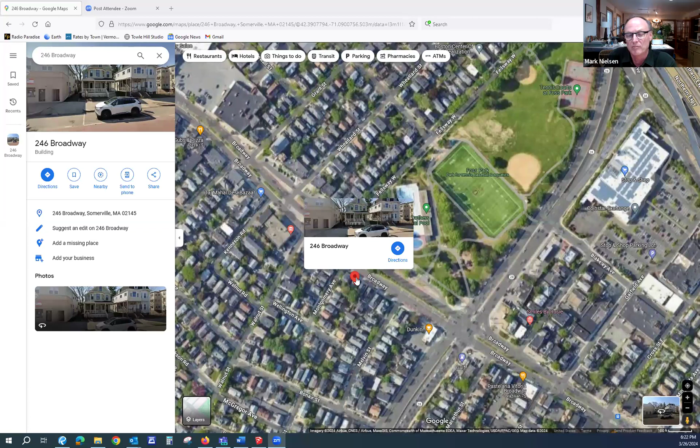Thanks, Adam. Let me just share my screen. I hope everyone can see the Google map here pulled up. Just a quick spin for orientation purposes. Foss Park is here, and our site is across Broadway from Foss Park. This is the structure that would be taken down to make way for the proposed project. View up and down the street. This location. So this is our proposed 5-story building that Adam just mentioned. And he ran through what the project yield is on the site.

The lot area is 3,660 square feet, which is small enough to require us to have 1,500 square feet of residential gross square feet per dwelling unit. It also is on a pedestrian street, so we are required to put commercial space on the ground floor. And the sidewalk is about 15 feet wide. So the front of the building adheres to the 2-foot required setback because the 12-foot setback off the curb doesn't affect us. And I'll just skip through the landscape plans for now and go to the images.

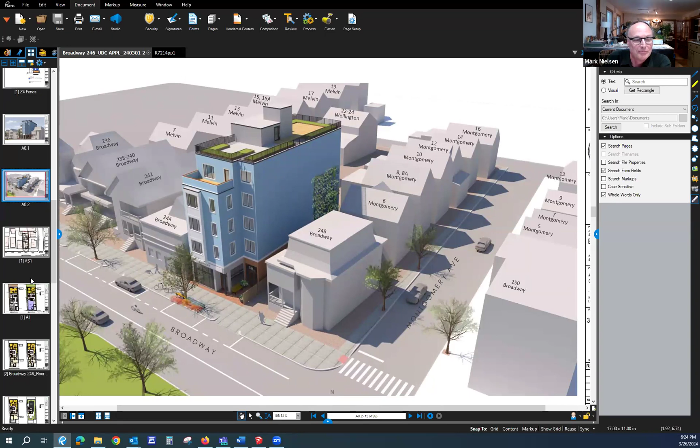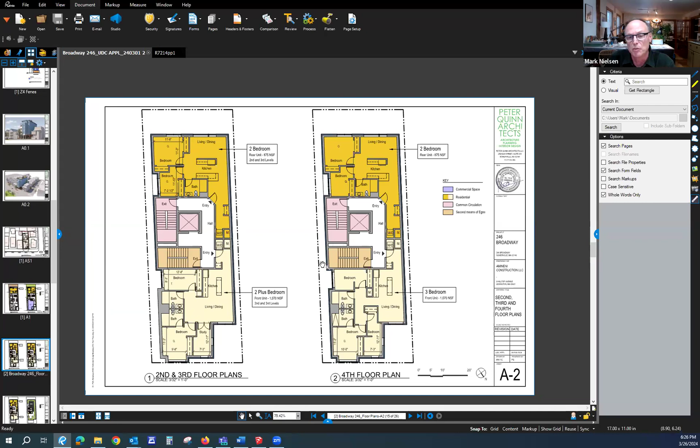On the upper levels, the building just zones out pretty straightforward. There's a front unit and a back unit. And there's an elevator and fire stair core. Windows are primarily set on the front and the back of the building. We do have a notch in the building in both the front and the rear unit that accommodates windows for second bedrooms.

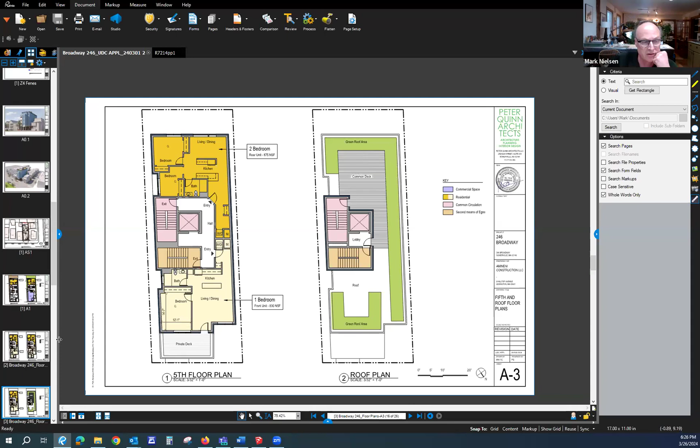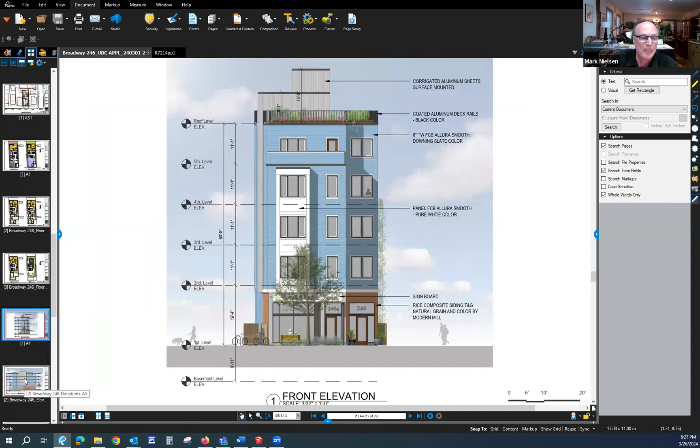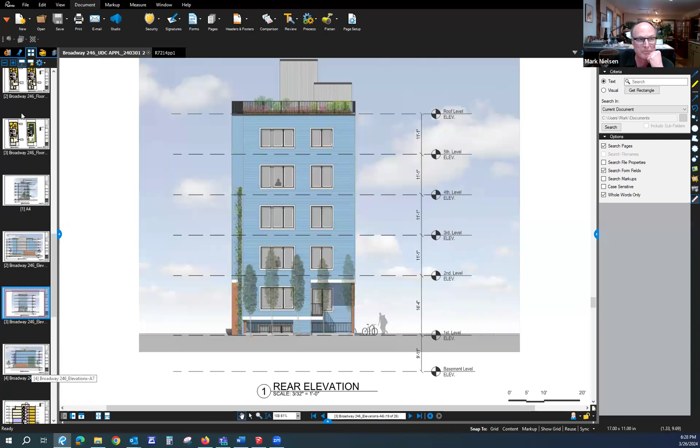Rear facade. The rear facade is set back 10 feet from the rear lot line, and it's cut in in this area here on the first and basement level. This portion is for a set of steps that come out of the basement and go into the backyard. And this is a small outdoor space, allowing for some larger windows into that basement. Back up to the plan to catch that. We're talking about this little area here.

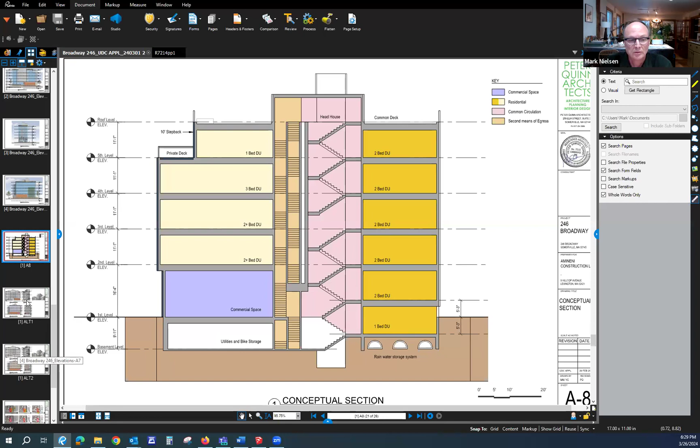And here's the rear elevation. So this window is now flush with the back of the building.

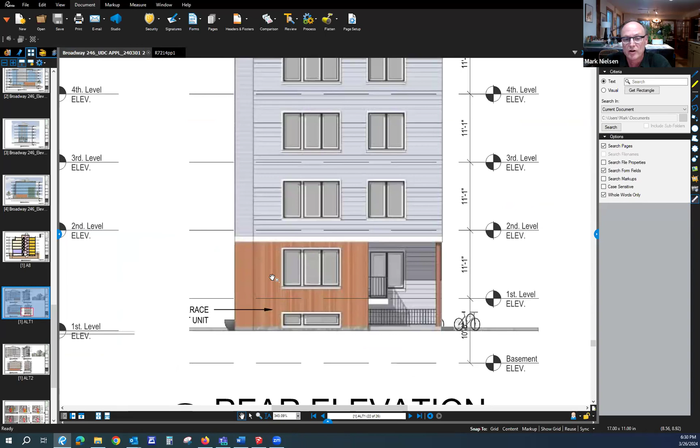And the second alternative is all the same maneuvers in the back of the building, but with a further reduction in the front of the building and making this a 2-story bay as opposed to a 3-story bay. In the front here, we have brought back a second material so that there's a material change between this portion of the building that sets forward on the street and the entry wall of the building behind. So this would be a lap siding and this would be shiplap.

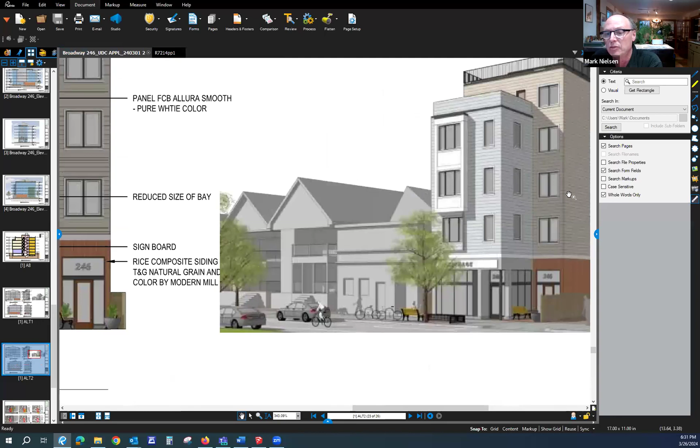That's another idea. And in the back, we've played around a little bit with a panel, a fiber cement board panel that would tie these windows together and break up the wall of the rear elevation a bit.

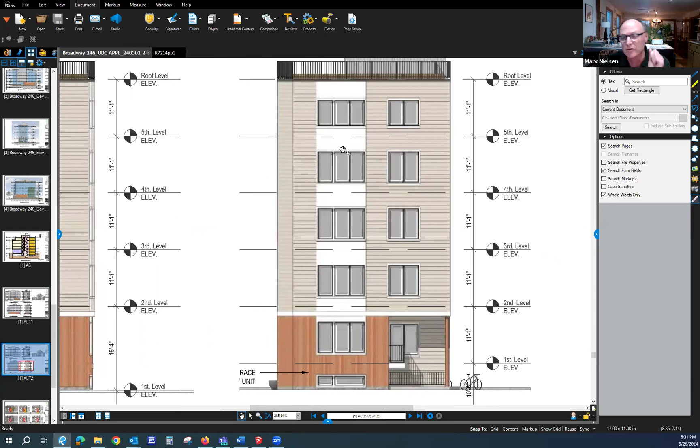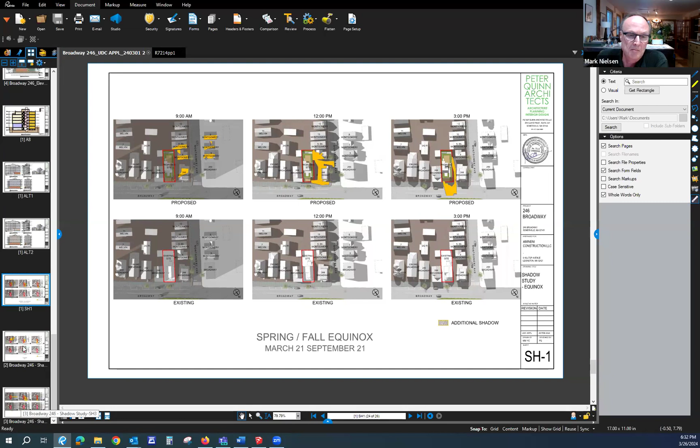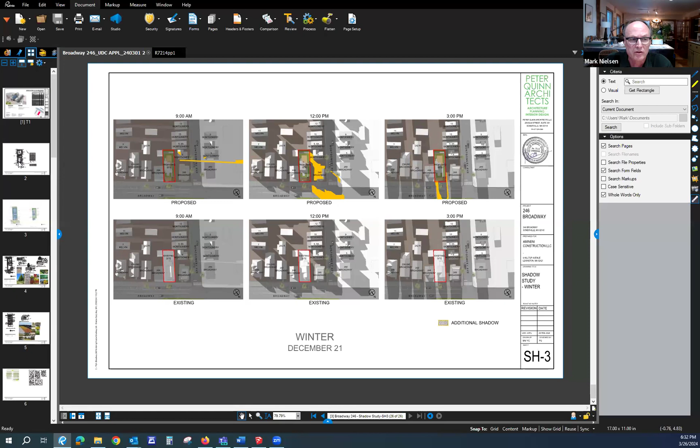And winter. And with that, I can turn it over to Katya. And Katya, what would you like me to start out with? Just the first drawings? That page there, yeah, that's perfect, thank you.

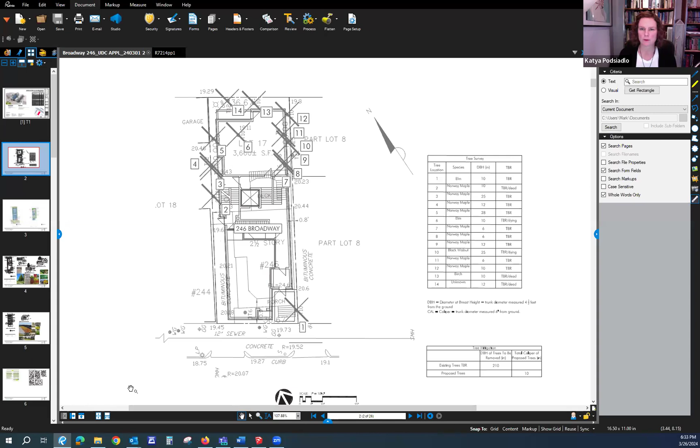Next slide, please. So this is our landscape plan and the roof deck plan on one page. If you want to zoom into the left one to begin. We're focused on two main goals, supporting residential living in this building, and then also making lots of improvements to the public realm, as you can see in the streetscape there.

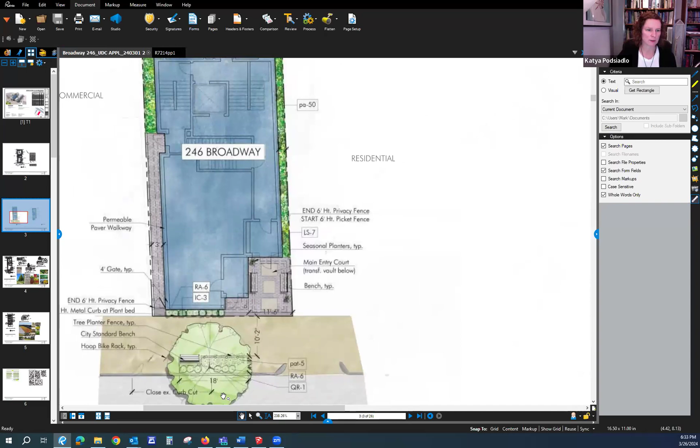As Mark mentioned, there's an existing curb cut towards the left-hand side of our property frontage. That's the existing one on the right. The one on the left is being closed. So the driveway that serves our current site will be closed, therefore making the sidewalk contiguous and safer for everyone walking up and down the street.

Also, to improve the aesthetics, we're proposing a new street tree and a generous tree well, a new short-term bike rack and a bench, as well as structural soil below the adjacent concrete pavements to support tree growth. As you know, in Somerville they like 1,000 cubic feet of soil for trees, so we try to achieve at least that.

We're showing permeable unit paving along the left-hand side of the building to access that egress doorway from the left-hand side stairwell. And at the main front doors to the lobby and into the retail space, we'll also have special paving.

The project is proposing new privacy fencing around the sides and the rear, but also at the rear we have some increased setback. Mark, can you remind me what the distance was before and now, the actual dimensions? I don't have it noted on the plan. Yes, it's 10 feet to the face of the foundation, and with the extra insulation, it's 9 feet 8 inches from the property line to the outside face of the building.

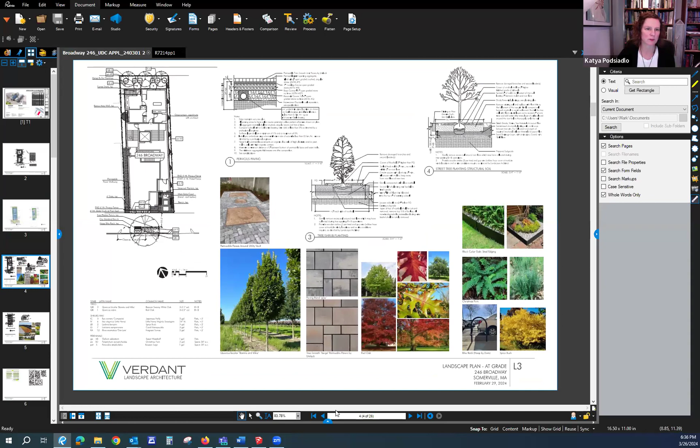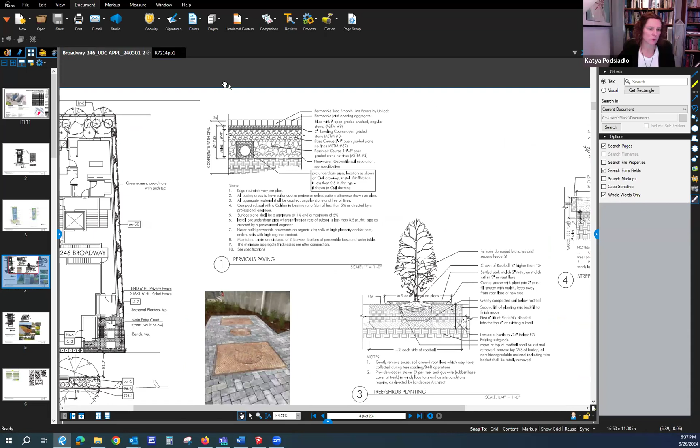The image in the middle of the page shows an installation that we've done a couple times now in Somerville for a transformer vault, with the unit pavers cut to fit around the vault covers. So there is going to be a transformer in the ground at the front entry, but it works quite nicely to have the unit pavers cut right around it, and it's all flush. So we're able to kill two birds with one stone, if you will, right at the front.

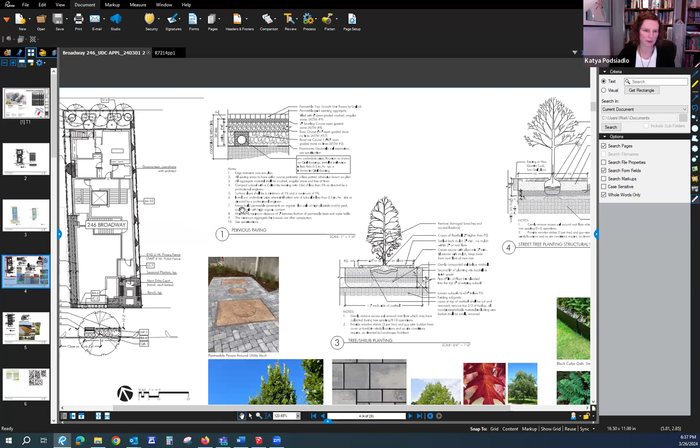Those are just some of the varieties of the trees shown in the other images. And then on the next plan, we can zoom to the roof deck materials and get a sense for some of the things we're proposing up there. I'm not 100% sure what kind of pedestal pavers or decking will be used, but it would be either your typical modular 2x2 system or more of a sleeper and composite wood deck system.

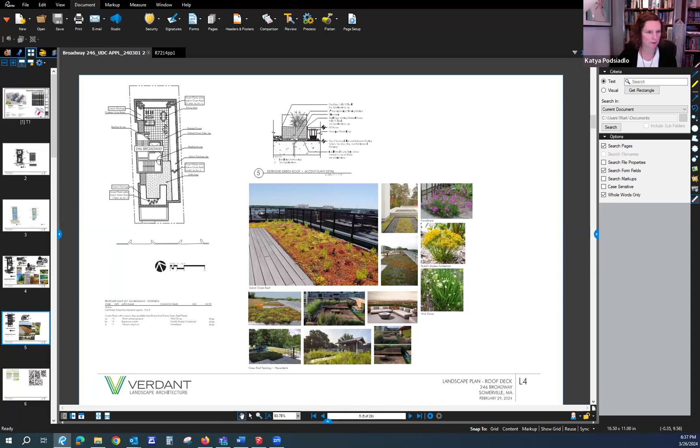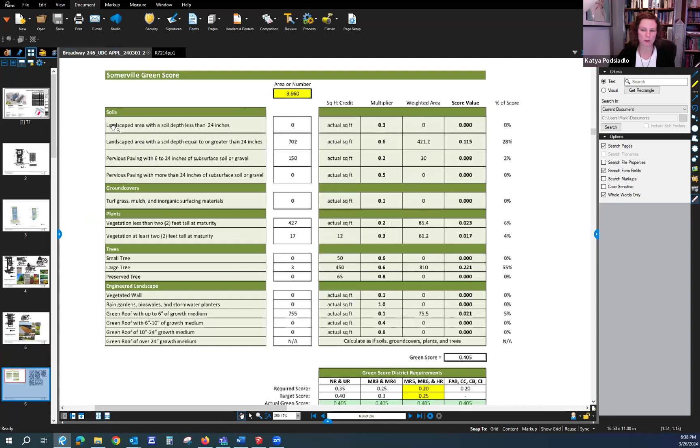Next page, please. I think this is our final page that shows the green score calculations. And with the slightly larger setback along the rear, we've increased a little bit of green space and our green score has improved a little bit. So I think we're at 0.3 something before, now we're at 0.405. And that's all I have.

Thank you. I have a question right off the bat, just because it's timely, sorry. So there was a green wall shown on the architectural plans, but that was not discussed at all in landscape, and we haven't had much luck with green walls in Somerville. Let me clarify. Yeah, good question.

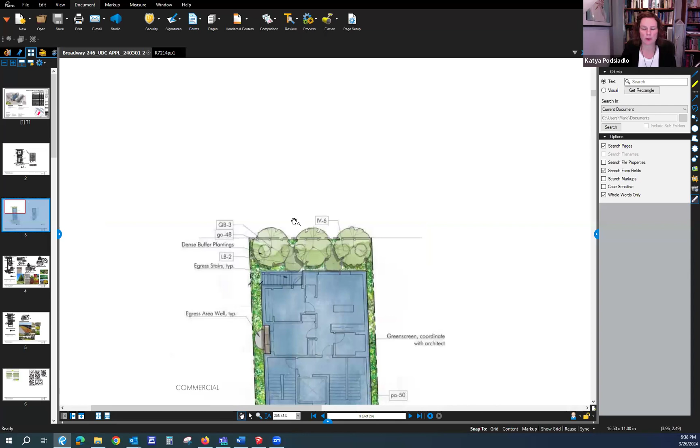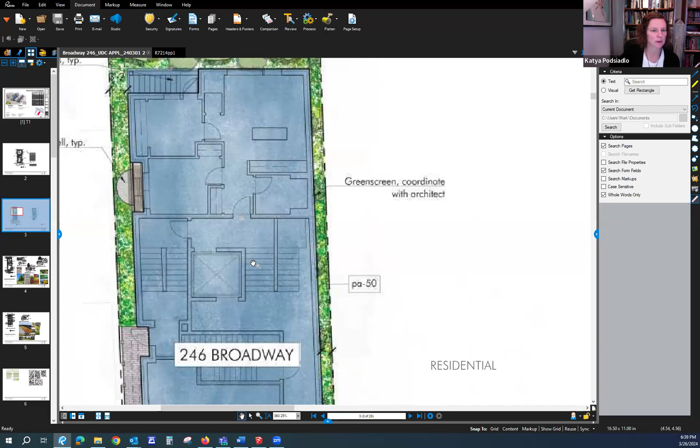We are proposing vines to be planted on a green screen. So not exactly a green wall where there'd be soil supported in planters up the wall or something. There'd be vines planted in the ground with a green screen attached to the building, or some sort of trellis system attached to the building and vines growing up. And we're proposing, I think we have Lonicera honeysuckle vine planted in this scheme. And the exact width and height of that green screen, we'd love it to be real tall.

And I know that there really aren't evergreen vines per se, like twining vines in the Northeast, unless you get something that's sort of like an invasive species, five-leaf akebia. So I'm kind of hesitant to propose something like that. So I'd rather something more like honeysuckle or Campsis radicans or something.

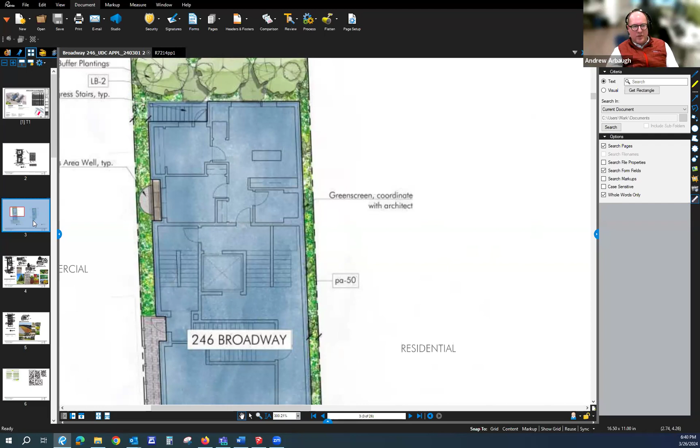I'm gonna let Andrew speak to the rest of that, but I am gonna register my concern on the record that we don't have much luck whenever this has been proposed. Inevitably, lots of times people come back to me and say, what can we do with this screen now that nothing will grow on it? I would note too that they are not counting it towards their green score, which I do appreciate, because I have similar concerns, which we can get into. Yeah, we're not counting that as a green wall in the green score.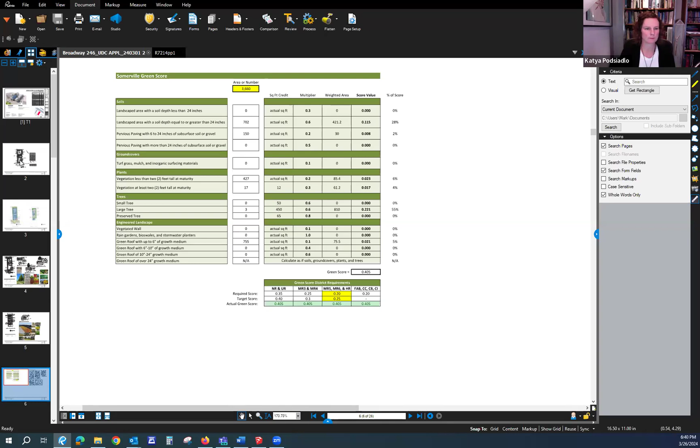All right, Commission, it's your turn. Do we want to go through questions as a group first? Sure. So just one clarification. You mentioned that because of the size of the building, zoning district, 1,500 square foot minimum per unit applies. So that is the total gross area of the building that requirement applies to? Is that correct? It's the total gross square footage of the building minus the commercial space. Okay, great. Thanks.

And then just a clarification question. I understand that the buildings internally are stepped, but the lot itself is relatively flat. Is that correct? Yes, that's correct. Okay. And then the yard in the back, is that through the exclusive use of the first floor residence? Yes. Actually, the basement resident.

The proposed materials that we see on the screen here, like white at the bay window. Apologize if there's a vacuum in the background. The white at the bay window and the blue, and then at the retail and the red. Can you remind us what you're proposing there? Sure. This is a fiber cement board panel system. This would be a lap fiber cement board, Allura, with I think it was a slate blue color. And then down here, we're proposing corrugated aluminum at the commercial structure signboard.

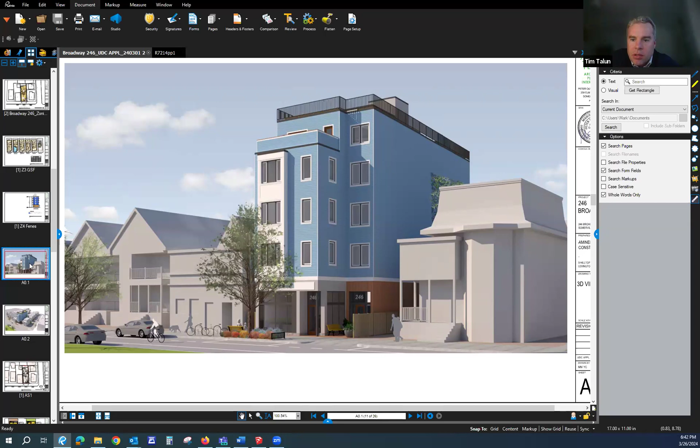And then this is a relatively new product. It's an artificial wood, but it's made out of rice. So it comes in the natural grain and texture. Modern Mill is one of the companies that produces it. It's a tongue and groove, and it would be vertically mounted on the building. And would that go all the way down to the ground, or would you have another material at the building? It's probably going to need a water table, because I don't think it would be a good idea to die it into the grade. So that's probably an 8-inch either concrete or granite tile if it's visible.

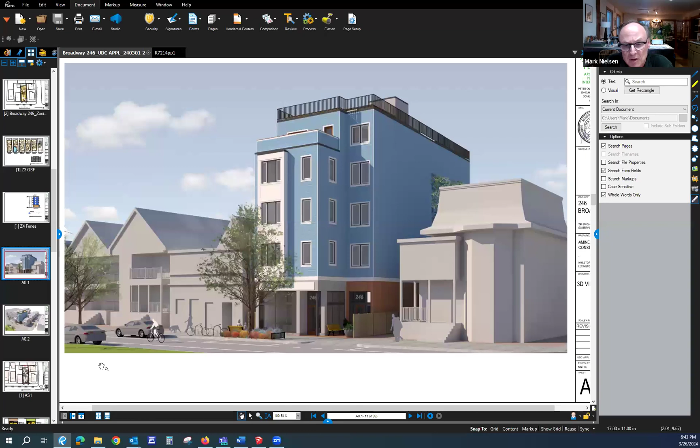Sorry, just remind me the material cladding the commercial area. That's aluminum, a corrugated aluminum. Okay. Do we have any images just for context to see the material a little bit better? Let me see if it got rendered on the elevation.

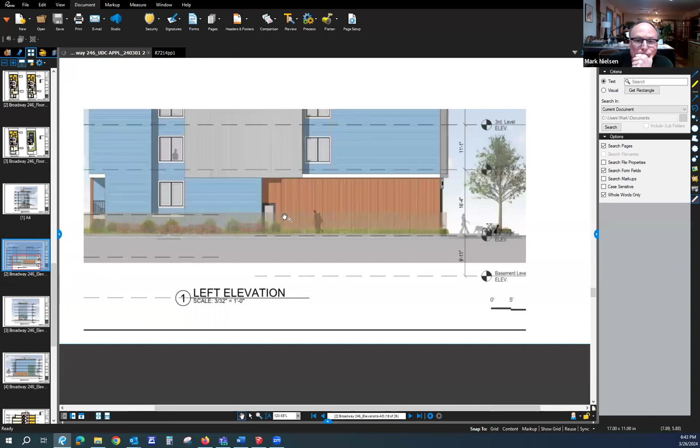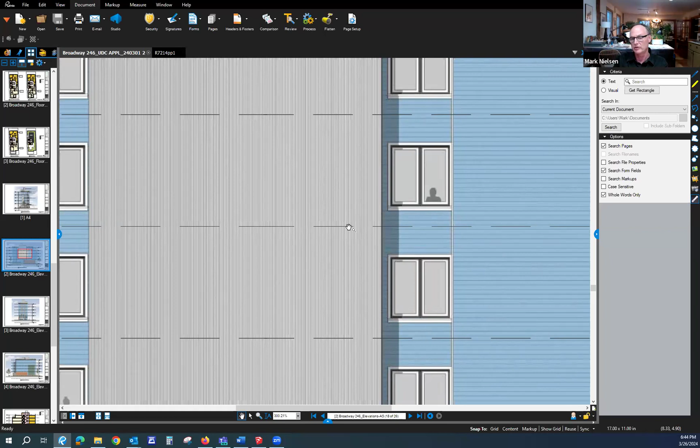I'm not sure this is going to be that instructive for you, but it would be sheets that would have a joint line at the floor plates, and it would be fastened from the outside into the structure of the wall. So did I get that right? It will have exposed fasteners? Yes, it will have exposed fasteners. And the joint lines are uniform, so there's one joint line at each floor all the way as opposed to staggered? Yes. Well, we have it at the principal floor lines here. And there would be one here too.

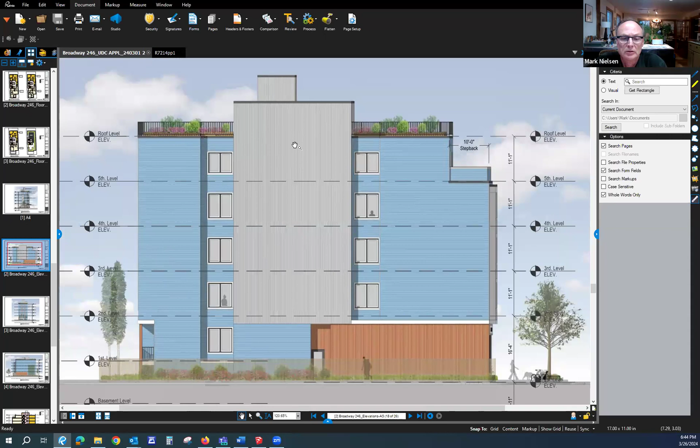And for the corrugation depth and kind of style, I'm not sure if you have a drawing of that, but can you describe that? Well, the corrugated. What we were thinking is that it would be the wavy corrugated sheet product. There are different profiles that would be available. ATAS International is one of the companies that we go to when we are looking for this kind of material. I could pull up their website and we could look at their product if that's something you'd like to do.

Should I do that? I didn't want to kind of derail the conversation with the search, but I think having some sort of a profile would help, but just don't want to pause our discussion with the search or anything. I think it'd be good, Mark, if you want to pull it up while we're talking about other stuff. Sure.

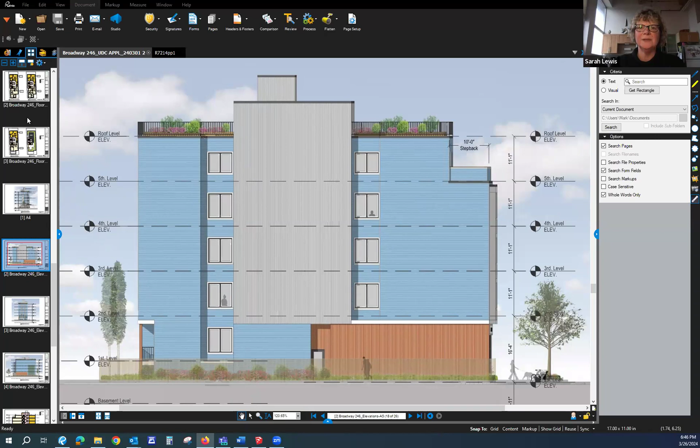I have another question about the unit in the back. I'm concerned about the livability of the basement unit where it doesn't even have that little outdoor terrace or big windows, or it feels like it's fairly compromised. Yeah, I agree. It's not shown in this drawing, but they're showing landscaping around here, and if this is kind of meant for egress, I'm just wondering, is that landscape gonna survive? Is that the proper egress path?

So that is the egress for the unit, is to come back up through that stairs, through the landscape. We have two means of egress out of the basement unit, and they're both off the hallway. This is an egress window for the bedroom. But this unit can get out of the building by entering into the landing portion of this fire stair here, or it can go up and out. So the stairs off that living room are not considered one of the egresses. No, I don't believe they're required for egress. We just wanted to be able to get at the backyard.

But to Tim's point, the egress window well would be traversing plant life for the length of the stairwell to get to the walkway that is the official egress. Yes, that's true. This window would be on this plan here at grade, right here, and you were talking about this landscape going back to this pathway, right? Yeah, we could put some stone pavers in there. We were thinking that was just ground cover, so it's not a formal path. It's just an egress to get out, in an emergency or for maintenance, but there's no path. We didn't want to pave more unnecessarily.

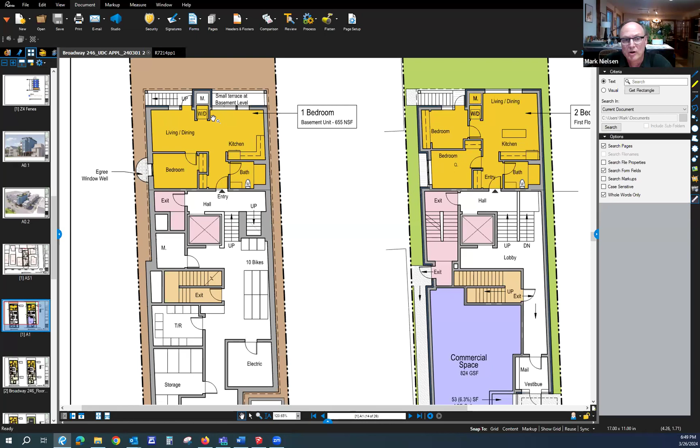On the alternate version that you had, it didn't look like the small terrace at the basement level was there. It looked like there were only clerestory windows into the kitchen area because it bumped out. Is that right? That's true. The alternatives both took this space and put it into the unit, and then we used that space elsewhere to modify the massing in the front of the building. Oh, so it's just a flip. Because of the clean lines of the one alternate, I personally kind of like it, so I'd like to talk about those if we could. Sure.

Which alternate is that? But just before we go off of the stair from that basement unit, I get the egress window and having landscape around that. As long as it's traversable, I don't think that's an atypical situation where you would need to traverse landscape out of an egress window. But I wonder about the stair coming from out of the living room and up. Are you walking into a space that is intended to be occupied by the residents of the basement unit?

No, I was not designing that exterior space to be a place to occupy with a patio or with chairs. It was planted with trees that are narrow, so their branching is fairly dense, and then there's some shrubs below them. So I wasn't planning for, I mean, you're able to be there and stand there and sit there. You could probably pop a chair open and sit there, but it wasn't a patio or anything like that. Then what's the purpose of the stair then? That's my question too, it's a lot of effort to get up there if you can't use it.

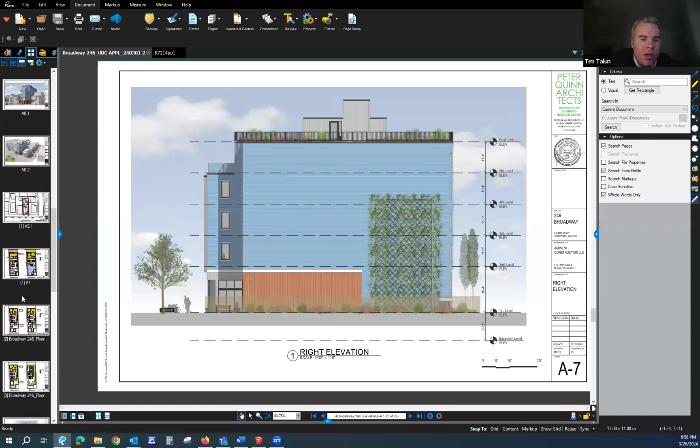But there's a building in Union Square that went up recently. It's a brick building, so very different materiality, but it has a pretty big blank facade right on the plaza. They put some pilasters on that facade, and it's marginally successful, but it's certainly more successful than it would be if it was just a blank wall. Yeah, I think I get the point.

Mark, the composite wood material, is that coplanar with the blue facade? Yes, it's all coplanar right now, but there's room to maneuver in the thickness of the insulation on that wall. When we think about the overall R value of this building, we have a lot more wall than window, in thinking about the whole building envelope in its totality.

So we could use the thickness of the insulation that's between the exterior sheathing and the material that's cladding the insulation, and go from 2 inches to 4 inches. Our R values would change a little bit for those portions of the wall. But given the percentage of glass to the percentage of wall area in this building, we probably have that latitude to still meet our passive house requirements.

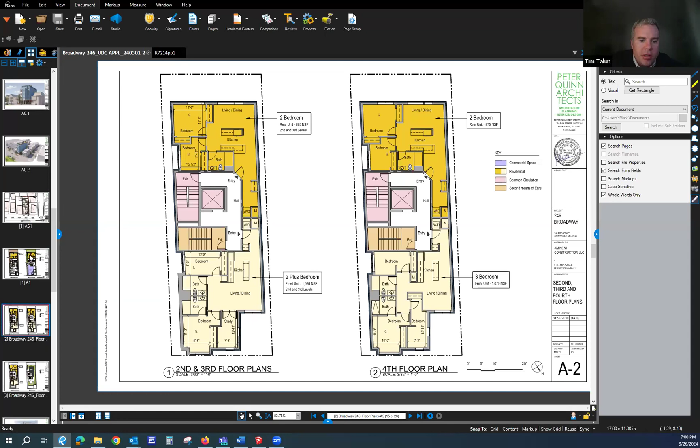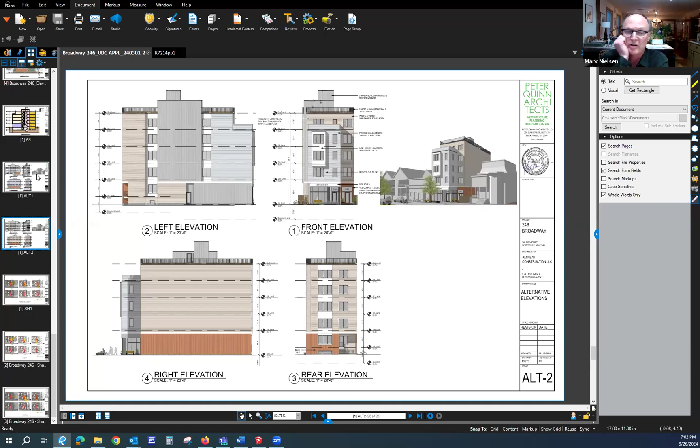Is the original proposal your preference, or the base? Well, that's certainly what we had developed. We spent a lot of our time developing that scheme. I think when we sat down and started to think about, okay, what are the alternatives? How do we come up with alternatives for this, since it's a tight site and a big building.

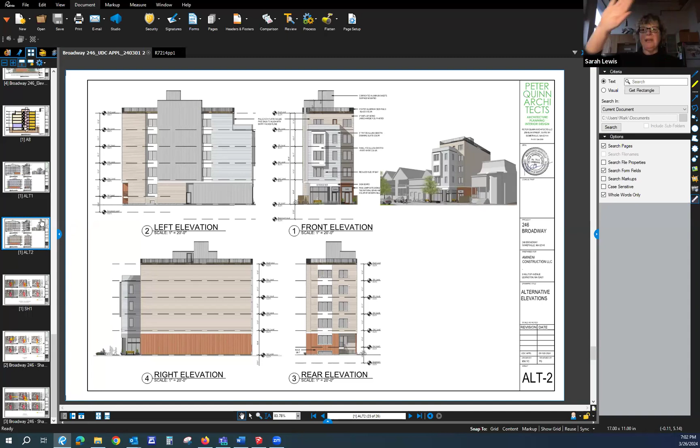It looked like on the blue version, the main facade, the main mass, what you've got here in the tan, there was a projection forward. It wasn't the same. Yeah, right here. Okay. So in both alternatives, we took this wall and we pulled it back to this plane, sort of clarified the mass between two objects. And this is a little less clear as to what's going on, but there's more shadow, so there's more play of light.

I would probably say, just in terms of the massing between the two schemes, I think the scheme in blue is successful. It's nice and simple. I think the option to change materials from the projecting bay to the bay that was behind it, and then have another plane that's a third material, seemed to be a lot of change on a small facade. So I thought this scheme, in terms of strategy of how you were applying massing and materials, was most successful.

I did have some questions on the selection of materials, the vertical material, and then the siding. My only concern is the guidelines are suggesting to avoid horizontal and vertical siding materials for MR5. So I was wondering if there were alternate materials that you had considered. You mean something that wasn't like a lap siding or a shiplap siding, but more of a panel? Yeah. No, we hadn't gone there.

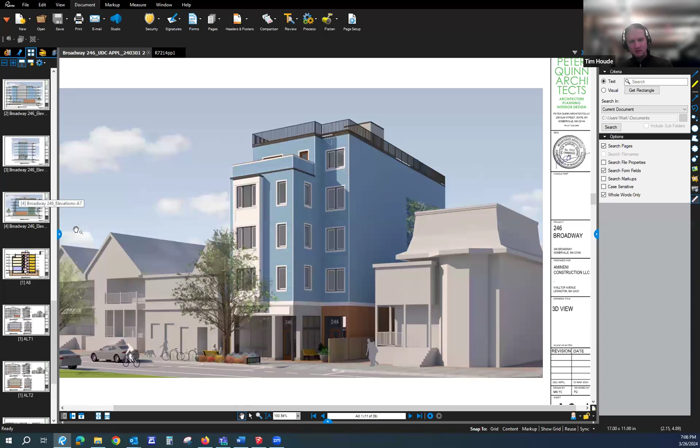I wasn't sure if the corrugation, the metal on the side, and the wood, and then the horizontal lap siding, if they were fighting each other, if the corrugated metal, which seems to be more of a commercial product and more modern texture and application, versus the traditional lap siding, if that dialogue was conflicting in terms of styles.

Yeah, as an alternate for the corrugated metal, I suppose we could do the fiber cement board panel here, and so reduce the number of materials on the building by one. I think this particular facade has these recesses for the windows, and therefore it sets up this mass to be handled a little differently than the other parts, which I thought was a good idea, because it helped to break up the scale of the building, that big wall. But it could do the same thing with a fiber cement panel with aluminum reglet joints.

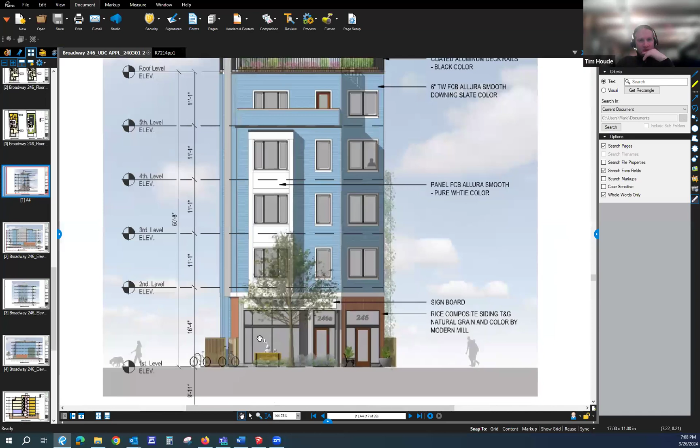Yeah, the material on the front, I'm just thinking the metal seems out of place a little bit given the material quality itself and how the rest of the building is treated. So I'm wondering if maybe the front material could be applied on the side as well, if that might be an option. Are we talking about the wood look? Yeah, could it be the wood look material carrying up the building, so it's not just at the ground floor? It could be that too, yeah. This is a handsome product. I think it would look quite nice.

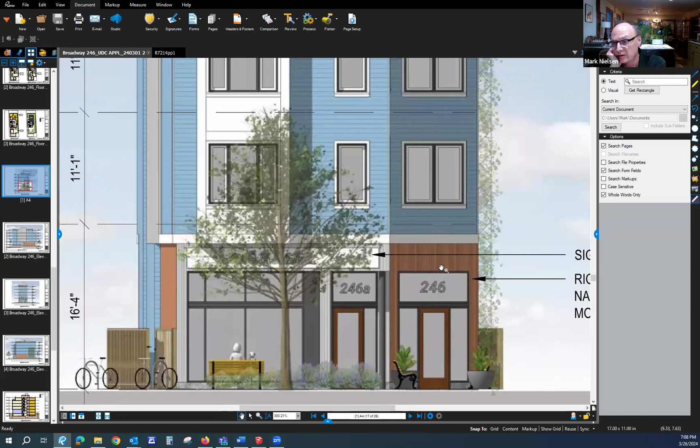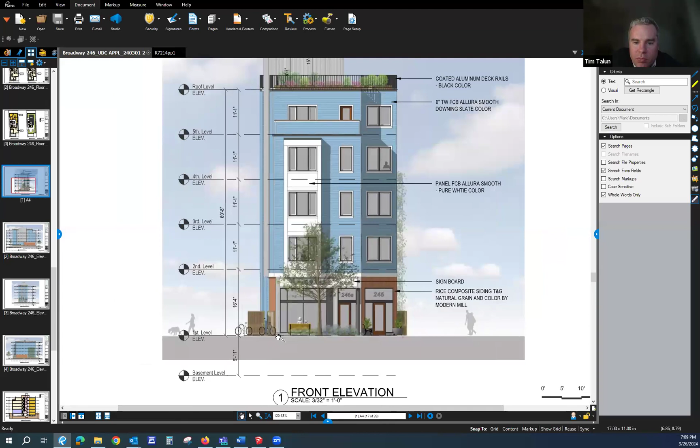Yeah, I think that's a good observation that Tim's made. I think I understand why you varied the material on that side, and that's a good decision. But maybe simplifying the material palette and just using that wood look material may be a good option.

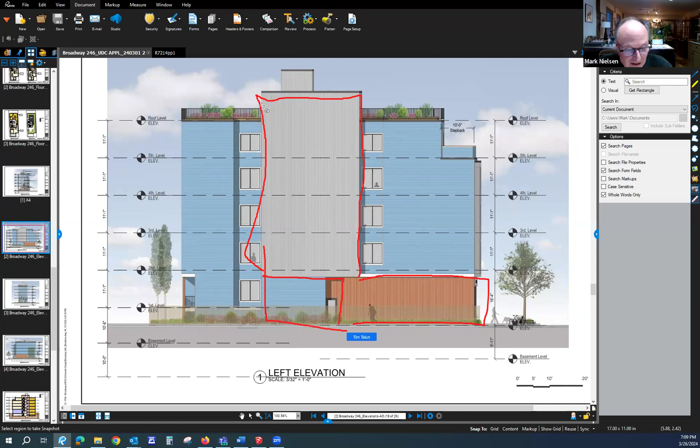And is there a way of grounding that mass then, connecting it to what's below? Because I think it would be weird if you saw a piece of the building that only touches in one little corner. Is there a way of bringing this down and grounding it? I can do this. There you go.

There you go. I totally forgot that we could draw now. I'm like, what magic are you doing?

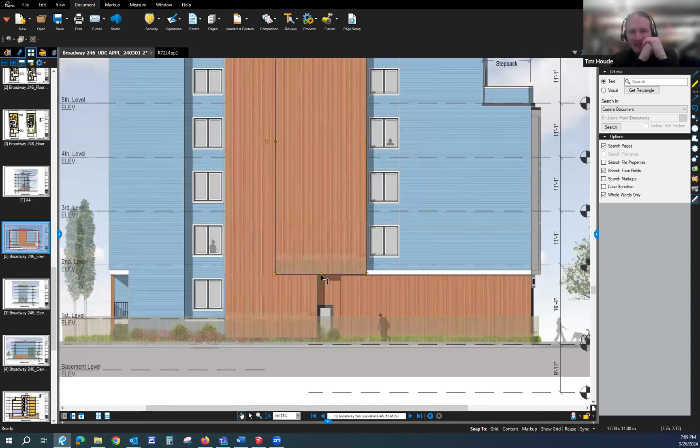Some joint lines. Yeah, I think it grounds it. I think I like that suggestion. Right? And I realize this is schematic at this point, but as you develop it, I think anything you can do to refine the level of detail around the window openings within the field of the horizontal lap siding, because I agree. I think for a building of this scale, residential building, even though the guidelines kind of discourage the use of horizontal siding, I think it's an appropriate use here.

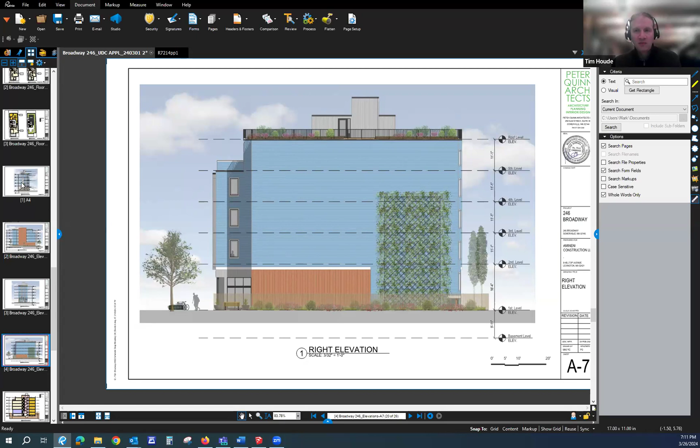Another building that I'll often reference is, there's bad examples of horizontal lap siding, and then there's the building at the corner of Bow Street and Somerville Avenue, 4-story historic building there that's recently renovated, and a beautiful example of horizontal lap siding. There's also a horizontal lap siding building in Union Square. There's other examples of this kind of narrow, tall, 4-story residential building on Broadway. So it's not really out of place on Broadway. There's some older buildings on Broadway like this, but they have a pitched roof.

Yeah. One other thing I'll just mention, I think there's a couple other examples of buildings on Broadway that meet the ground at the sidewalk level in a really, really poor way. And I think what you're showing here, the commercial storefront is nicely proportioned. Looks like it has the potential to be nicely detailed. But one of the things we may want to consider including as recommendations as a committee is just ensuring that water table, that there's a stone base or whatever it is at the base of the building along Broadway.

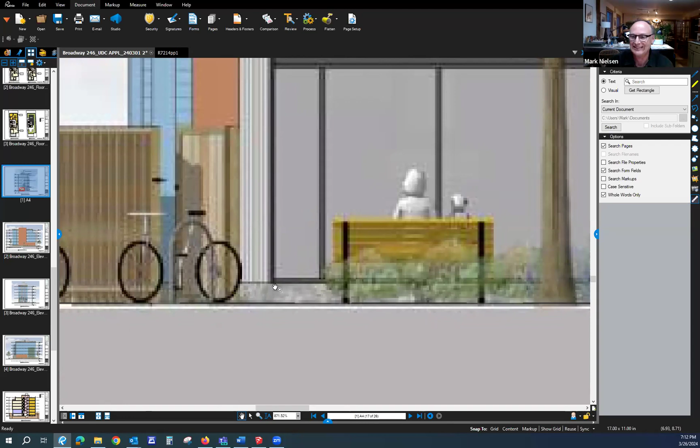Yeah, and I think you're showing that it already is. Yeah. Perfect. I think it helps when you zoom in. That's beautiful. I think that's convincing in terms of what it's trying to do. It avoids the one at Temple and Broadway. Temple and Broadway, they left out the stone at the base.

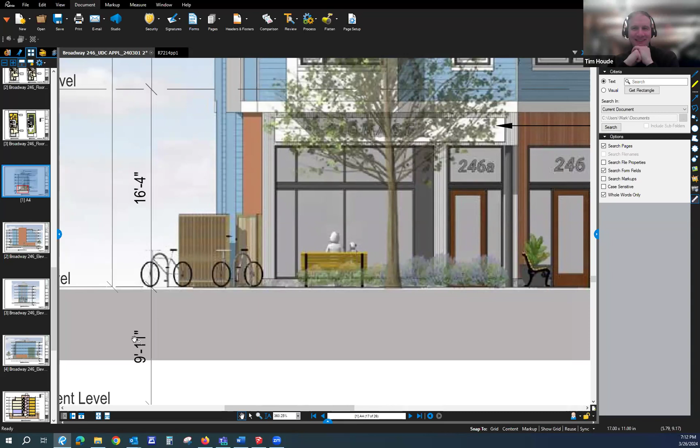It's bad. Don't talk about that building. They left out, yeah, they left out like half the building. So that's why the planning board will never approve face brick again, as in, thin set.

So I think, would it be fair to just briefly summarize, or are there other things people want to talk about? I did not have other items I wanted to address. No, I think that's it.

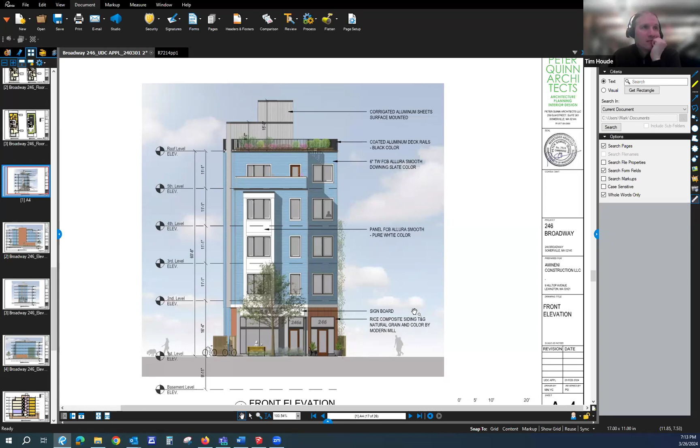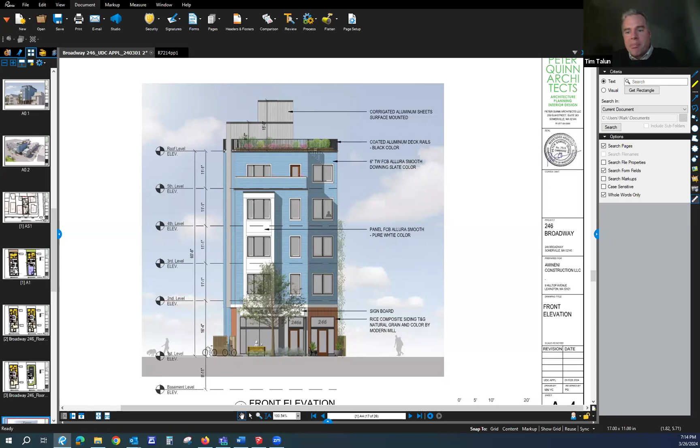But I'd say, I see you have the bike parking. For a building that's providing no vehicular parking, the bike parking becomes even more important because that's going to be some of the residents' means of transportation. And I see it's in the lower level and there's a path to get there via elevator and stair. So I think that's fine. I wish there were a way to provide it at ground level and have it be even more usable and accessible without needing to carry the bike on the elevator or lug it up the stairs. But you don't have the room at the ground level. So as you continue to develop the ground floor plan, making sure that path is very clear and usable is important.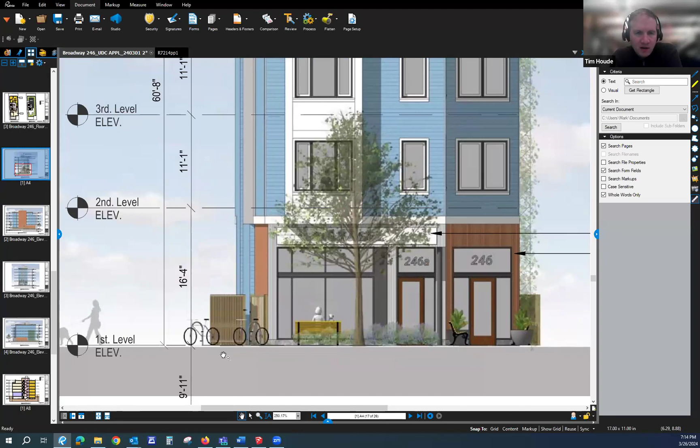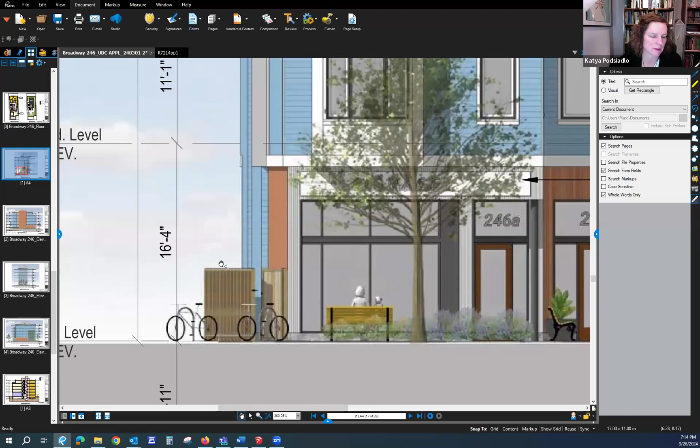In the front elevation, there was suggestion of a gate. And I saw it reflected in one of the landscape plans, but it wasn't in the architectural plan. I think there's not much room there to install a door and a gate. I was just wondering what you were proposing. I don't think I had actually shown a gate in that location. I like the idea of it to privatize that walkway, make sure trash doesn't blow down the little alley, if you will. But I'm not sure it's needed.

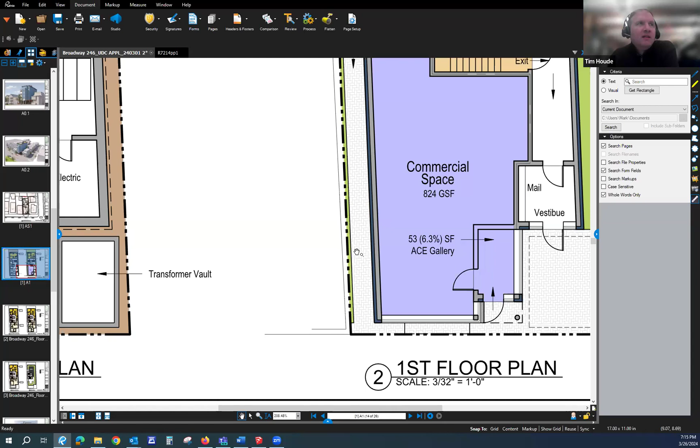What do we have for a setback there? Mark, is it like 5 feet? Yeah, I think it should be 5 feet from here to here. I hadn't asked for a gate there. I think that's something that the person who rendered the elevation... we would need to combine. Landscape plan L3, it's noting a 6-foot high privacy fence. I think it says that it's a 3-foot space as well.

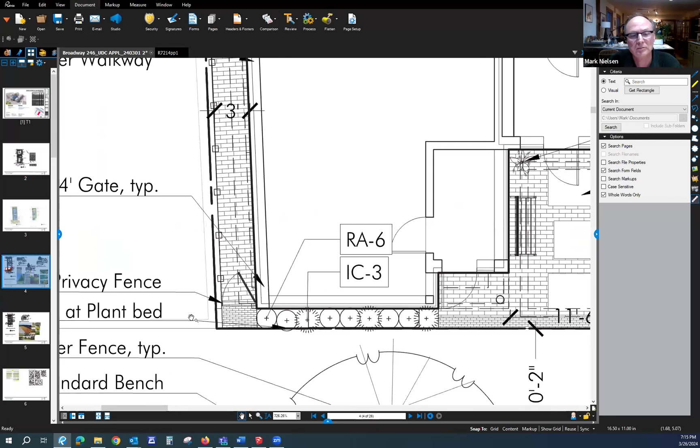L3, did you say zoom into the bottom left there? There you go. Oh, I did show a gate. Forgotten. Well, I think a 4-foot gate would fit in there if we want one.

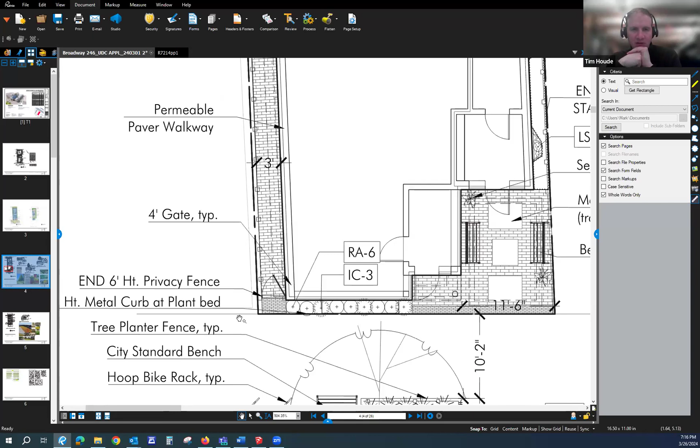Yeah, I think it's a busy street. It would probably benefit the residents. I was just kind of, since it was viewable from the street, I was wondering what that would want to be. Mhm. Well, it's probably okay to keep it part of the wood system of the perimeter fence, but it will have to swing out as opposed to in because of the egress path. Okay, we'll flip that around.

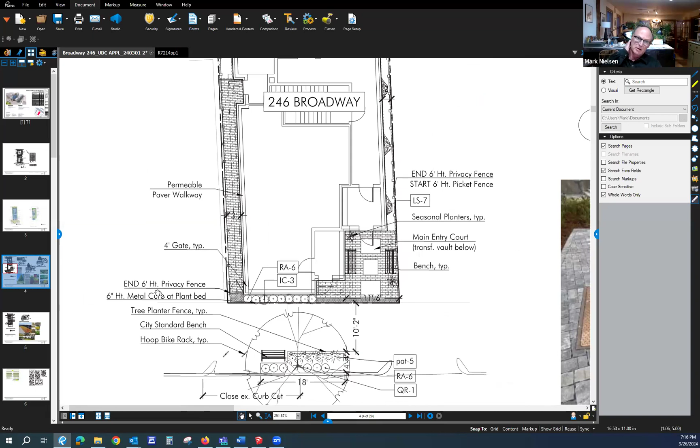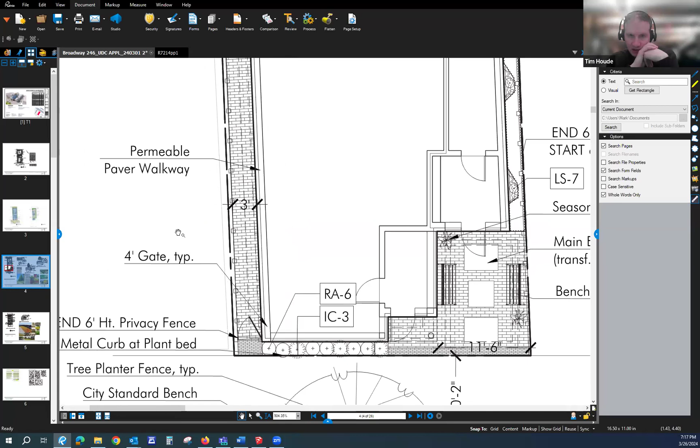Yeah, good point. And yeah, you would need to be 3 feet wide. I call it a 4-foot gate, but the pathway is only 3 feet. That's just because in order to install a fence, each element you install in the landscape takes up a few more inches. So we were being conservative with the room we had left over for a minimum walkway of 3 feet, but there might be a little more room than that. So I would double check that egress width requirement.

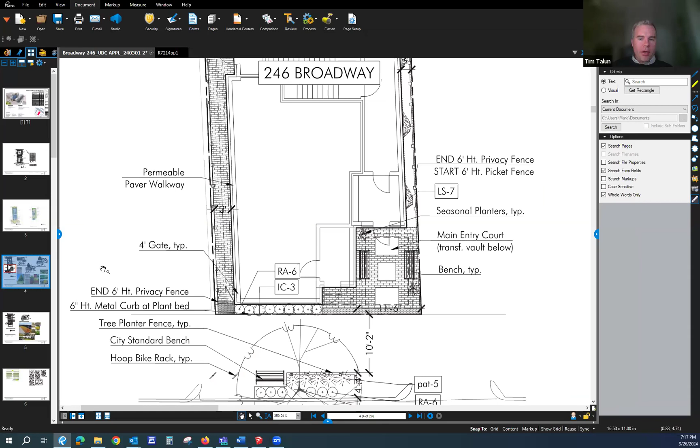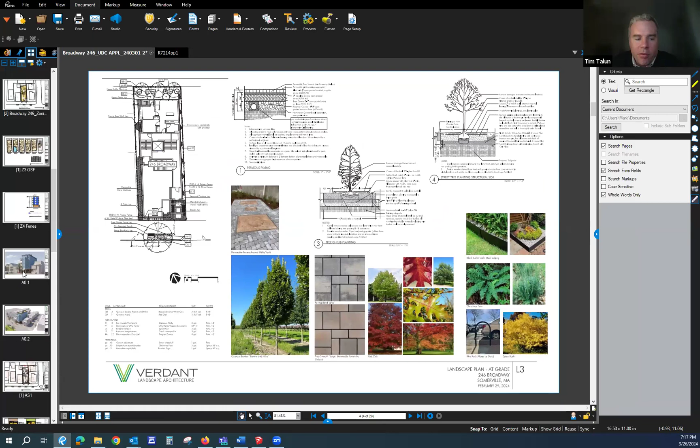I had a question, maybe this is more for Sarah. We've seen a number of projects lately that are proposing no parking. This is one of them. I guess it is within the half-mile transit zone. It's not super close to a T-stop. But I'm wondering if there's any effort citywide for developments that are not providing any parking for residents to provide access to shared cars, either Zipcar or through other private companies.

It's recommended, and a lot of the larger projects do. I don't know on this project yet. There will still have to be a mobility management plan. I'm using the wrong terminology for mobility's process right now. Because they usually look at bicycle movements and pedestrian movements, not just vehicular. So that will probably be part of the process.

This building, if parking is not required and not provided, then the residents will not be able to get on-street parking permits either. So that will be further restricted. So the short answer is, well, that was a long answer for the short. I'm not sure yet, Tim. Okay.

I would note that the city's goal of 75% of trips in Somerville not being by car by 2040, I mean, having no parking here is something that the city's trying to encourage. I would also note that diagonally across the street is going to be the whole new Old Star Market site redevelopment, the whole 40B project, which has no parking on site either. So that is certainly a trend. Yeah, I think that's a good point.

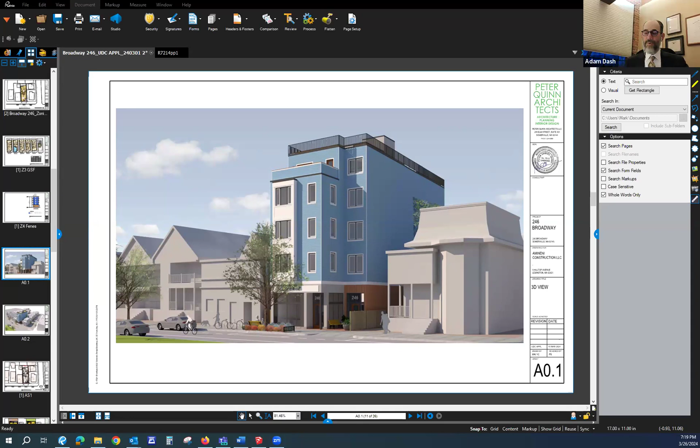But 75% of the trips not being by car still leaves 25% of the trips by car. Right, but if you have a shared car, then that's a trip by vehicle. I think they're trying to discourage that. Right. But I live around the corner and I don't have parking, and we survive. Yeah, the bus goes right down in front of the building on a dedicated bus lane. It's pretty effective. Yep.

Okay, Andrew, did you want to talk a little bit more about the landscape before we start? I've been scribbling notes, or do we want to move into a couple of architectural votes first? Compliments on the roof terrace, I think it looks very nice.

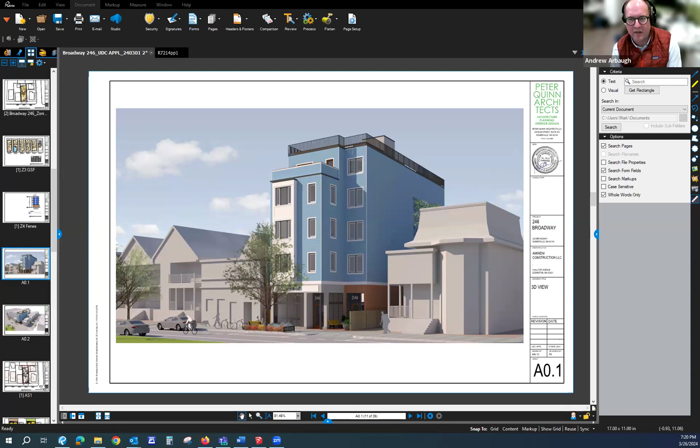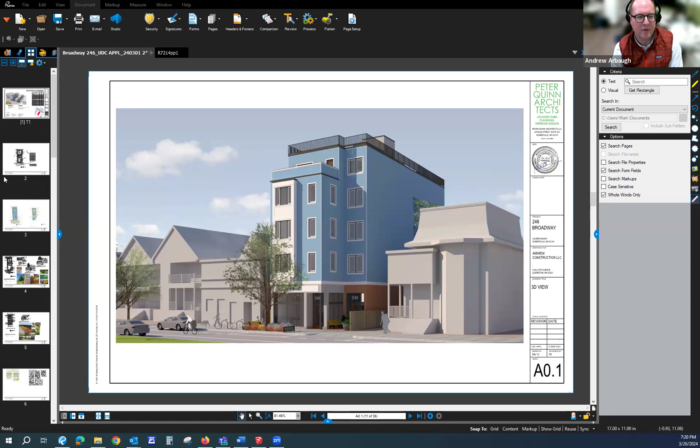I would like it if that back terrace were usable in some way, if it was serving a little bit more than hitting green score. If that last unit that has access to it has an outdoor space with some amount of paving that they can use. Again, to have the stair come out of the unit and just dead end at planting seems very odd. Well, I think we do have wiggle room now, so we'll take a look at that. Okay.

And I appreciate the upfront nature about the trees. You have to note, it is pretty sad to lose 210 caliper inches and replace it with 10 is not great. And especially with the volume of building that's going in, which is not the landscape's issue, that 210 calipers cannot be replaced on this site really ever again. So that's not great.

To that point, thank you, Andrew. I do recommend that the team reach out to the city arborist because there's a process to remove that many trees. I have emailed Allison and she has recommended that they will review the plan once it gets uploaded to CitizenServe. So we have the actual application after the second neighborhood meeting, after we're through with you. So yeah, we got a little ways to go.

I do see a number of them are invasive species. Yeah, I was going to say that as well. Thank you. They're not great trees. No, they're just trees. They are mature trees. For sure. No, I'm not denying that.

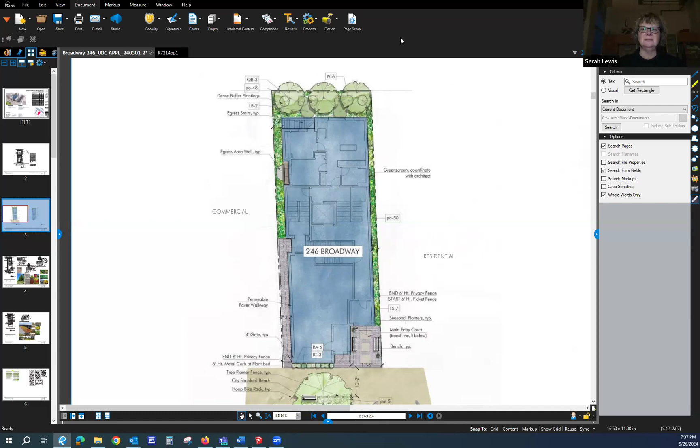Thank you. Oh, all right, and then we need one more motion to adjourn. Motion to adjourn. Second. By Andrew, seconded by Tim. Roll call vote. Tim Talun, yes. Tim Hood, yes. And Andrew Arbaugh, yes. All right, meeting is adjourned at 7:37 PM.